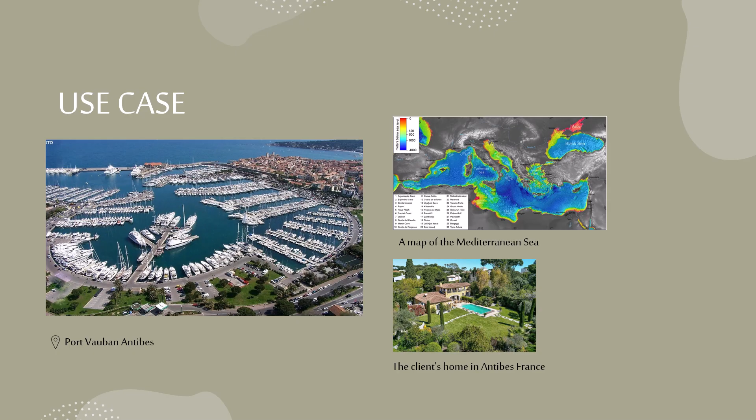Here's my use case. The clients, Madeline and Claude, an older couple from France. The boat will be used in the Mediterranean Sea from Antibes, France, to Spain and Italy to visit family. A 65-foot boat is large enough for all of their must-haves, but can still be captained by themselves without a crew. These are some of the boats included in my parametric study.

They all have the traditional look that I was going for in my design. The inspiration for this boat mostly came from the Marlin. A picture is in the upper right-hand corner. It is a 52-foot 1930s commuter yacht.

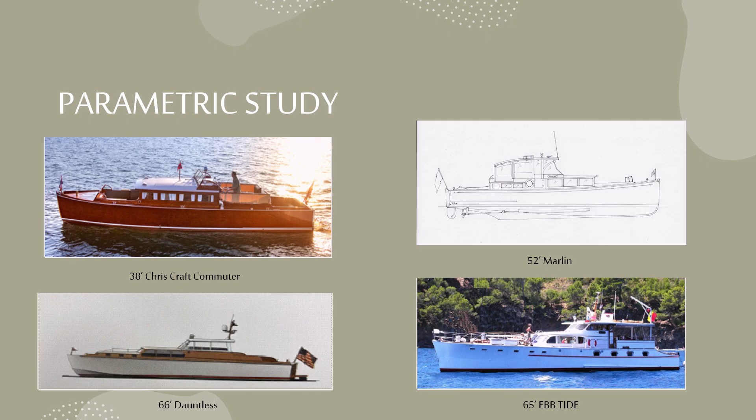The clients really wanted the sun lounging space and the sunken-in seating near the bow that the Marlin has. I think I was able to capture that well in my final design. They also wanted to be able to see down into the galley from standing inside the cockpit.

This is the final hull design I used for the boat. It is a semi-displacement hull with a rounded chine and broken sheer. I had to add spray rails after doing some CFDs to minimize the spray coming in over the bow.

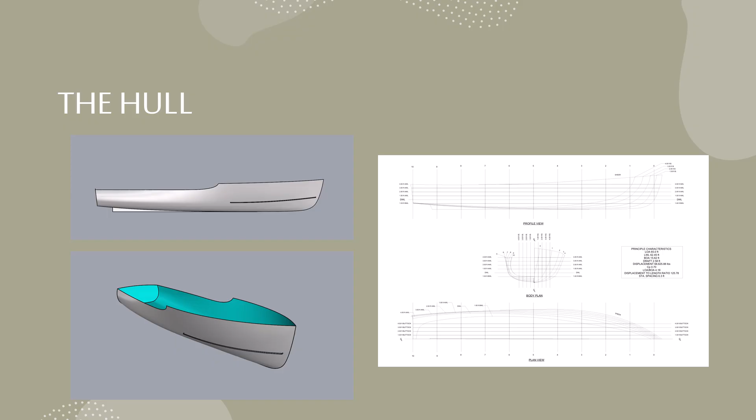The final lines plan is on the right. To the left is the final propulsive run going a total of 12.5 knots. To the right is the multi-speed run showing wake patterns. I originally hoped that the boat would go 14 knots, but it only ended up going 12.5.

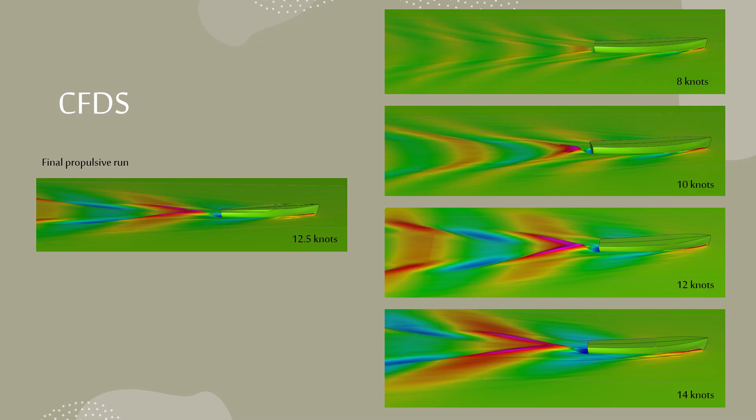If I had to change something, I would probably keep tweaking my hull to get that 14 knots that I was going for. The engines used for this boat are twin 150 horsepower Yanmar 4LV engines.

The engine room is in the middle of the boat. Access is through the hatch in the cockpit. I chose this engine because information was very accessible and Yanmar provides a 3D model of their engine.

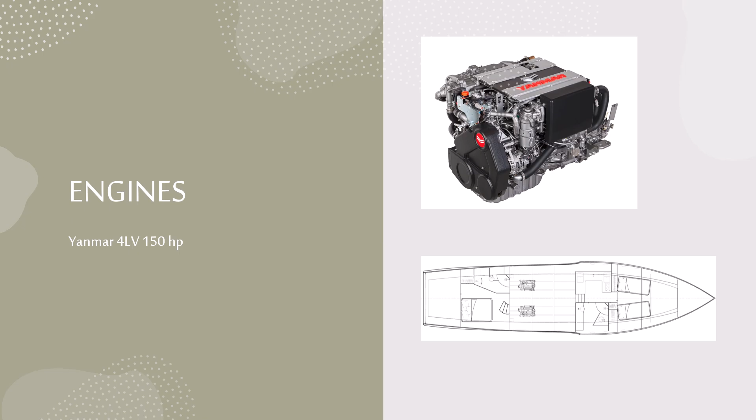These are the 2D drawings of the boat. The deck layout shows the cockpit and helm as well as all the exterior lounging. To the port side of the boat is the head and hanging locker in the master suite. A settee is in the cockpit and a galley and bunks down forward.

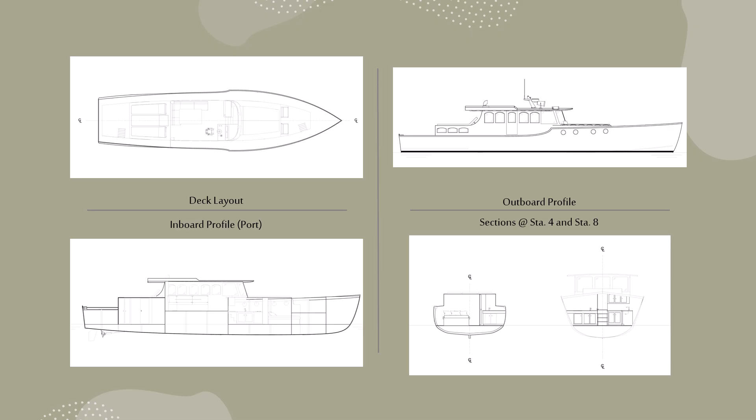Section 8 is shown on the left in the bottom corner and Station 4 is on the right.

Here is the final look of the boat. I think that it really captures the older traditional style that the clients were looking for. The windows and the portholes are a very traditional style, and the brass fittings that can be found throughout the boat really tie everything together.

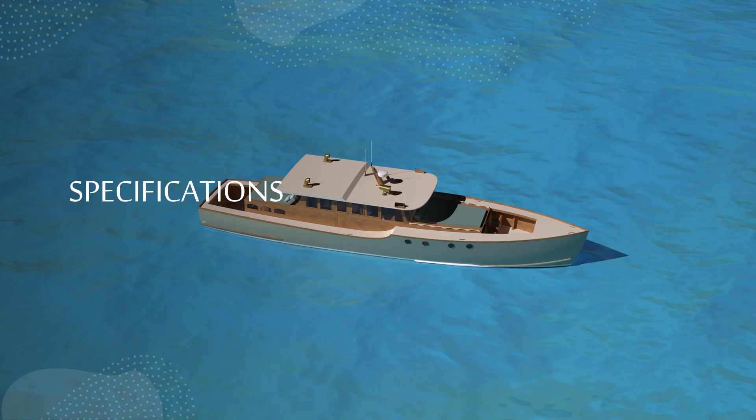Length overall of this boat is 65 feet. Length on the waterline is 62.5 feet. Beam overall is 15.6 feet. Draft is 2.6 feet, and displacement is 68,626 pounds. This boat has 500 gallons of fuel, 300 gallons of water, and a 150-gallon black water tank.

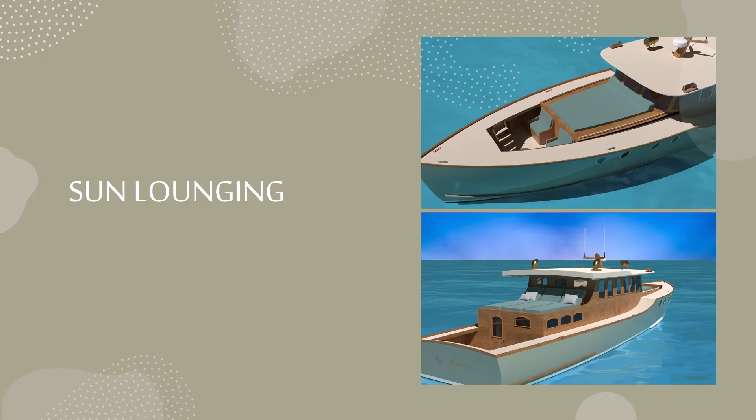Sun lounging can be found forward and also aft on the boat. There is the sunken-in seating near the bow area. This minimizes the space inside the boat, but it was a feature that the clients really wanted. There is a ladder to get in and out, and the side decks are plenty wide for you to walk on.

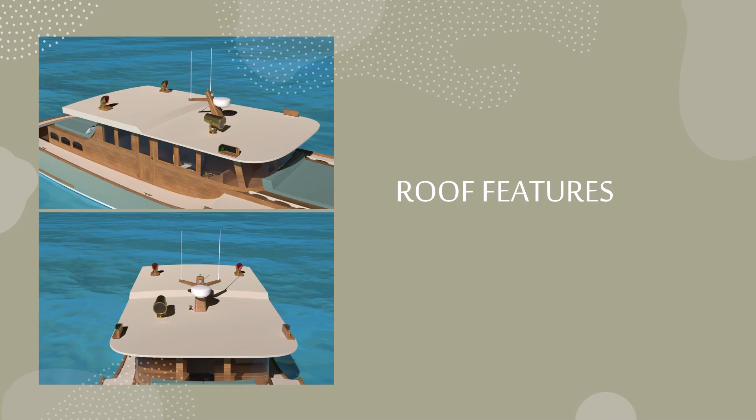I think that the roof really captures the classical look that the clients wanted. The roof features include brass dorade vents for the engine room ventilation, a varnished wood radar tower, a brass spotlight, and wood light boards for the starboard and port navigational lights.

The structure calculations are to ISO standards. It is a cold molded construction with Western red cedar for a lightweight and durable hull. The hull thickness is 17.5 millimeters, which includes 4 layers of plus minus 45 degree cedar veneers. Frames and stringers are solid cedar attached to the veneers.

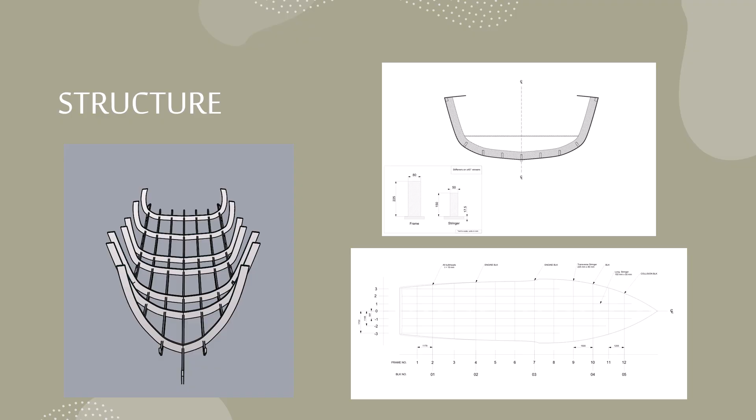The cockpit of the boat is enclosed and spacious. There's a settee and table for eating. This space is pretty minimal because of the entrance from the side deck and the stairs going to the stateroom aft and the galley and bunks forward.

There's plenty of visibility from the helm, and you can see the engine room access hatch in the cockpit in this photo.

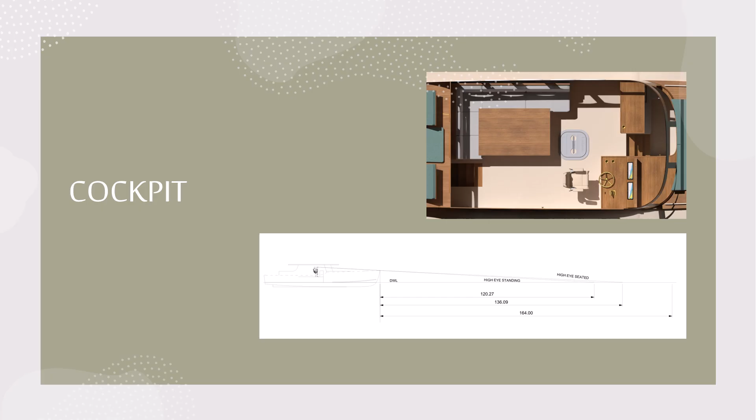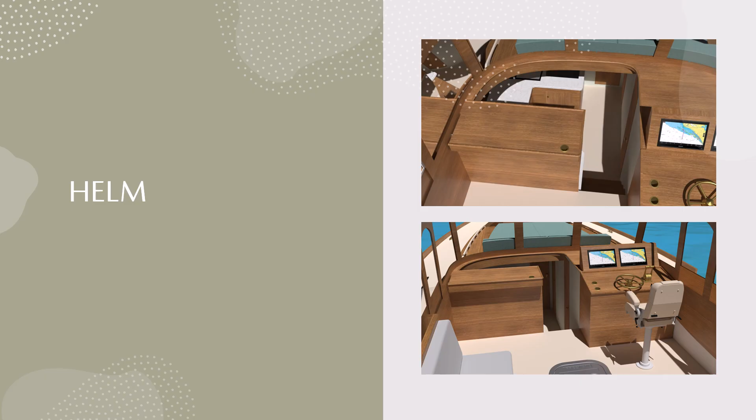I was able to design this sort of open helm on the port side that the clients wanted, so that you can see down into the galley standing at the helm or from inside the cockpit. It also just opens up the space a little bit. You can see that there are 2 Garmin chart plotters and throttles for the engines at the helm.

Here's a dollhouse view of the whole interior. The clients wanted to continue the traditional feel inside the boat without the whole interior being wood like most older style boats. The painted walls and marble countertops bring a more modern feel inside, but the varnished wood on the hull sides and exposed frames still incorporate a classical feel.

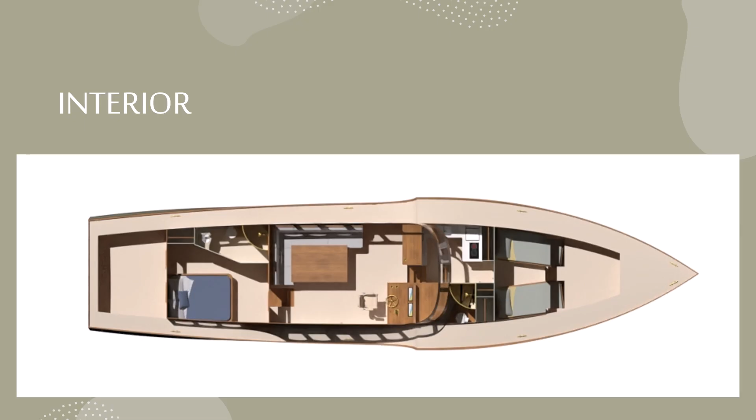This is the aft stateroom for the clients. There are stairs leading from inside the cockpit to this aft cabin. There's a queen-sized bed with a head which includes a shower and an electric toilet. There's a large hanging locker for clothes and storage, and a door to access the aft deck.

The full galley includes a large sink, 2 top-loading Dometic fridges, an electric 2-burner cooktop, while still maintaining some counter space and cabinet space for storage. A brass faucet was chosen to bring that exterior classical look inside the boat.

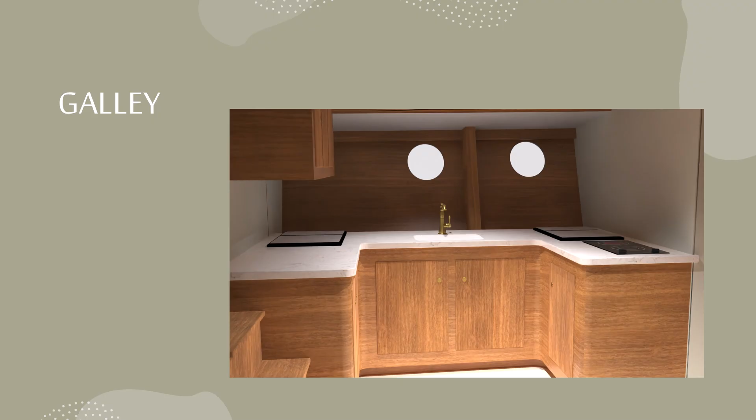There are 2 heads on this boat, one for the clients in the aft stateroom and one for the guests aboard the boat. Both have an electric toilet, a counter, and standing shower. Following the classical look again, the faucets and shower heads are an older style finished in brass.

There are 2 twin-size bunks forward for overnight guests, each with a hanging locker above, providing space for storage and clothing. Because the sunken-in seating near the bow limits the space, there are cutouts under the seats to provide foot space when lying in the bunks.